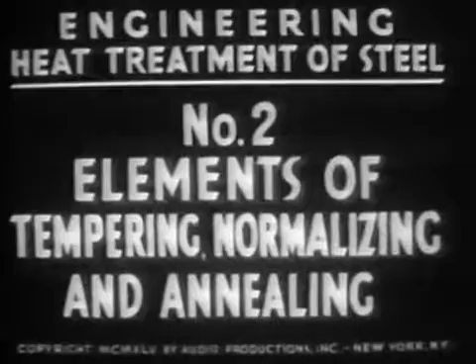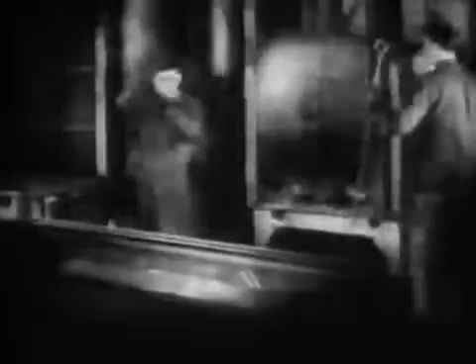A study of the hardening of steel shows that steel can be hardened by heating and quenching. Hardness, however, is only one of the useful properties of steel. Toughness, for example, is frequently essential. But fully hardened steel is not tough. On the contrary, it is usually brittle.

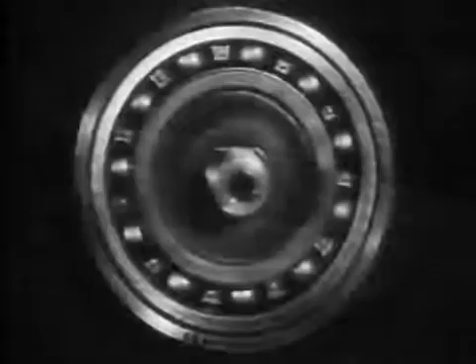Some steel parts, like this ball bearing, call for high hardness to resist abrasion, while only a moderate degree of toughness is needed. Other steel parts, like this automobile spring, require toughness to resist impact or shock, but also must be hard for resiliency.

These gun parts, called front guides, have been fully quench hardened. The steel is quite brittle. It lacks toughness. To make this type of steel tough enough for service conditions, it is tempered. Tempering, or drawing as the process is also called, is a method of toughening steel after it has been hardened. In the toughening process, the hardness is reduced.

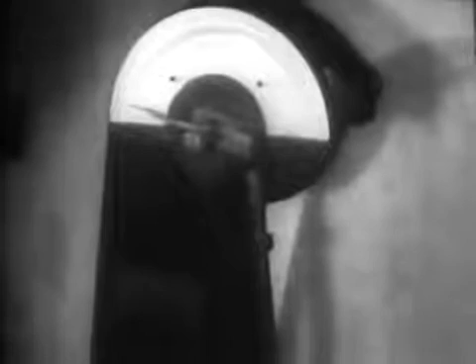When we speak of toughness, we need a quantitative guide, an accurate means of measuring it. The Charpy impact toughness testing machine answers that need. It determines the resistance to impact offered this pendulum by a specially prepared specimen bar of the steel under test.

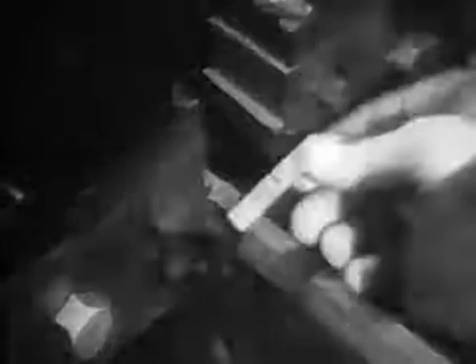The specimen is placed across the pendulum's line of travel. The pendulum is drawn back to a fixed angle. When the pendulum is released, the energy required to break the specimen reduces the swing of the pendulum. This dial registers the pendulum's travel. It measures in foot-pounds the energy required to break the test piece. This is a measurement of the steel's toughness.

When previously hardened steel parts are to be toughened by tempering, they are first reheated. Tempering temperatures are below the steel's lower critical temperature, the temperature at which the steel first began to harden. The parts are kept in the furnace until they are uniformly heated. Thus, tempering time depends on the thickness of the pieces and the temperature to which they must be brought.

After heating, the parts are removed from the furnace and allowed to cool in air. What has happened in this process to change the properties of the steel?

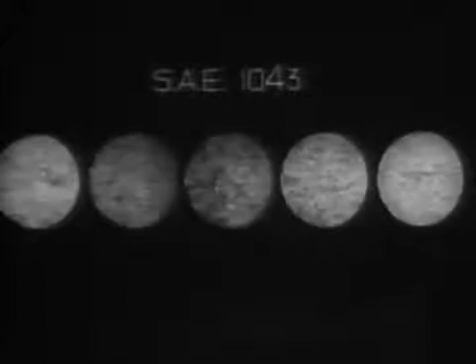Here are 5 micrographs of an SAE 1043 steel, which show its structure after tempering at progressively higher temperatures. In each stage pictured here, the steel is tougher than in the previous one.

The first micrograph is of the fully hardened steel. It shows the typical martensitic structure of plain carbon steel at maximum hardness. The steel's Rockwell C reading, the measurement of its hardness, is very high, 60. On the other hand, its Charpy reading, the measurement of its toughness, is very low, 3.

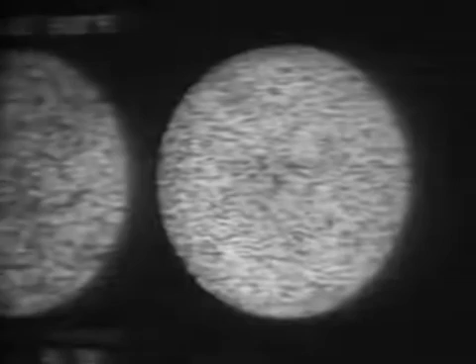This micrograph shows the steel after tempering at 1275 degrees, a heat closely approaching its lower critical temperature. A definite coalescence of the carbide particles has taken place. This is discernible where the black lines have broken up into dots. The steel is now very tough. Its Charpy reading is 65, but it is quite soft. Its Rockwell C is 20.

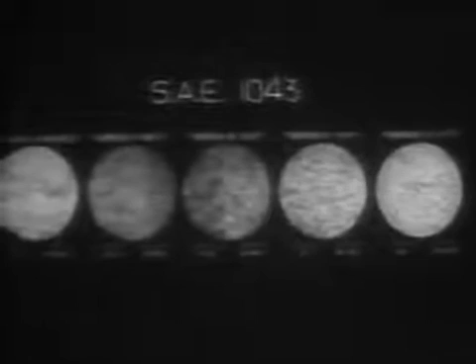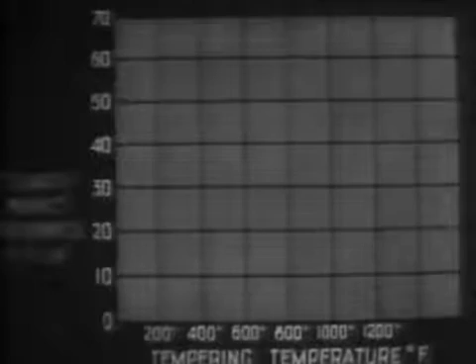From these and additional test data, a graph can be made to illustrate the relation between the toughening of the steel and the accompanying change in its hardness. As abscissa, we have the tempering temperatures in degrees Fahrenheit. As ordinates, we have the Charpy impact toughness in foot-pounds. We plot the values obtained by testing our steel after tempering at progressively higher temperatures.

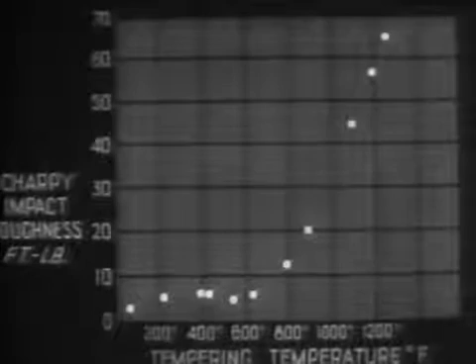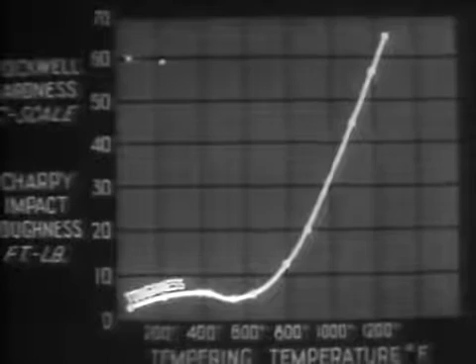These points give us this curve. Now we also plot as ordinates the hardness readings of the steel at the same tempering stages and obtain this curve.

We can see that there is a generally consistent relationship whereby hardness decreases as toughness increases. But there is an exception to this rule. Between 450 and 650 degrees, toughness actually decreases a little. However, there is no corresponding deflection in the hardness curve.

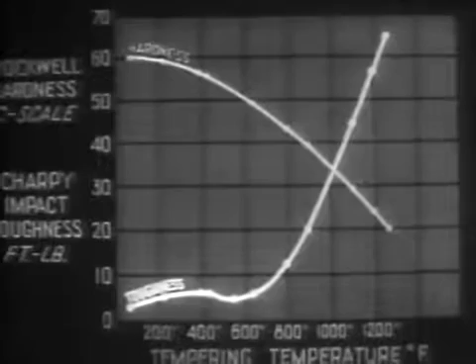This is called the brittle tempering range. But at temperatures above this range, and particularly beyond 800 degrees, the toughness increases very markedly. The same graph, drawn for any other plain carbon steel, would show a similar relationship between toughness and hardness.

Normalizing is a heat treatment employed on steel forgings or castings, for example. These forged pieces are being placed in the furnace to be normalized before they are machined. Normalizing removes undesirable coarse grain structures that may have occurred during hot mechanical working in the forging process.

Similar coarse grain structures occur in castings while solidifying. Normalizing produces a more uniform grain structure, better adapted to subsequent heat treatment. Sometimes normalizing alone is a sufficient treatment for obtaining the mechanical properties desired in the final steel.

In normalizing, the steel is heated to a temperature from 100 to 200 degrees Fahrenheit above its upper critical temperature. In this case, 1600 degrees. Here again, the parts are held at sustained temperature until they are uniformly heated. After heating, they are removed from the furnace and cooled in still air. Slow cooling in air is essential to complete the normalizing process started under the influence of high temperature.

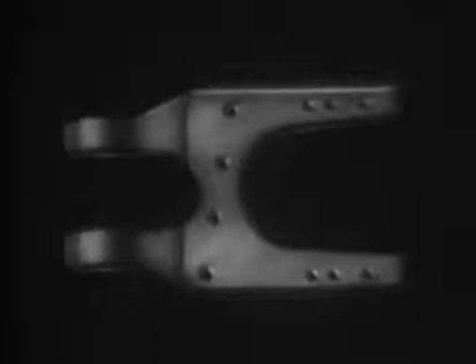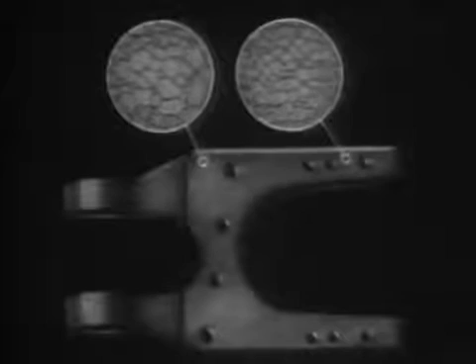Here is what happens during the normalizing process. Before normalizing, the crystal structure at these two points looks something like this, coarse and non-uniform. Notice the considerable difference in the size of the individual crystals. Furthermore, the crystals in the wide section are relatively larger than those in the narrow section.

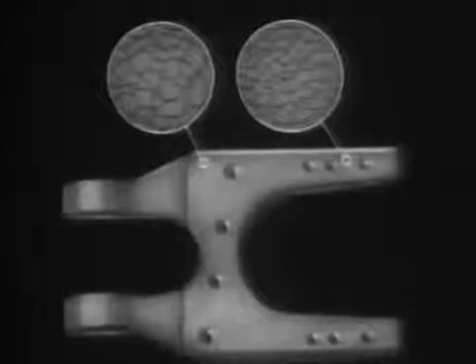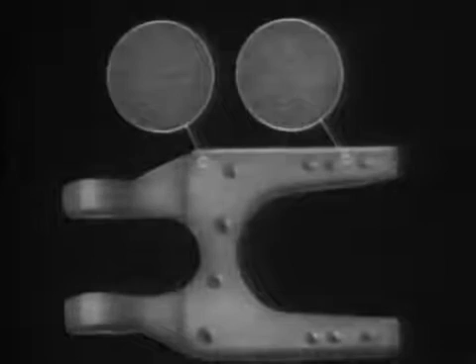As the part is heated to high temperature in the furnace, its varied crystal structure changes to one which is uniform throughout. Normalizing reduces the size of all the crystals. The result? A uniform, fine-grained structure.

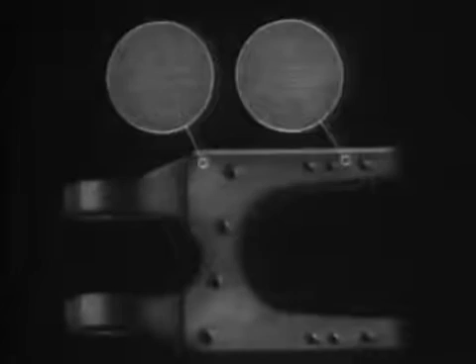Another process which, like normalizing, prepares steel for subsequent operations is annealing. Annealing is a stress-relieving process. This process also requires heating the parts in a furnace. Annealing has two principal functions. It relieves stresses occurring in the steel as a result of such operations as cold rolling, extruding, spinning, or punching.

And secondly, since it induces softness and ductility, it is frequently employed to facilitate mechanical working like bending, shaping, or machining.

In full annealing, parts such as these, made of plain carbon steel, are heated slowly to about 75 degrees Fahrenheit above their upper critical temperatures. In this case, 1,525 degrees. To assure an even temperature throughout the piece, it must be held at the proper annealing temperature for about 1 hour per inch of thickness. Then the heat is shut off, and the material is allowed to cool slowly in the closed furnace.

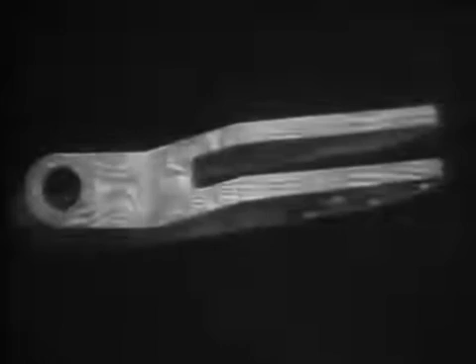This shows schematically the stresses induced in this part by previous operations. Under the influence of the high annealing heat, the stresses disappear. The slow cooling in the furnace prevents their return. Thus, when finally removed, the parts have been relieved of all stresses. In addition, they have attained a maximum softness and ductility, which makes it possible to machine them more easily.

To sum up, tempering, normalizing, and annealing are basic processes in the heat treatment of steel. In tempering, employed to toughen a previously hardened steel, heat uniformly below its lower critical temperature and cool in air.

In normalizing, employed to remove coarse grain structures in forgings or castings, heat uniformly to from 100 to 200 degrees Fahrenheit above the steel's upper critical temperature and cool in air.

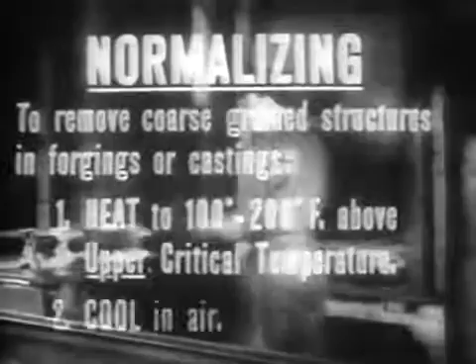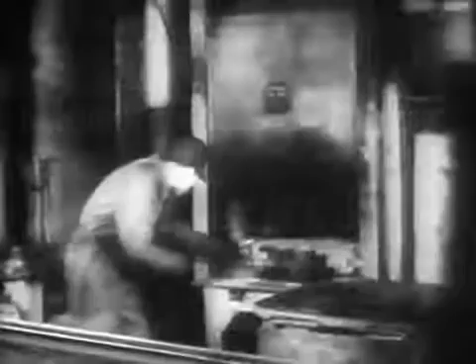In annealing, employed to relieve stresses and to increase ductility, heat uniformly, in case of full annealing, to about 75 degrees Fahrenheit above the steel's upper critical temperature and cool in the furnace. Thus, through controlled heating and cooling, specific changes in the properties of steel are achieved.